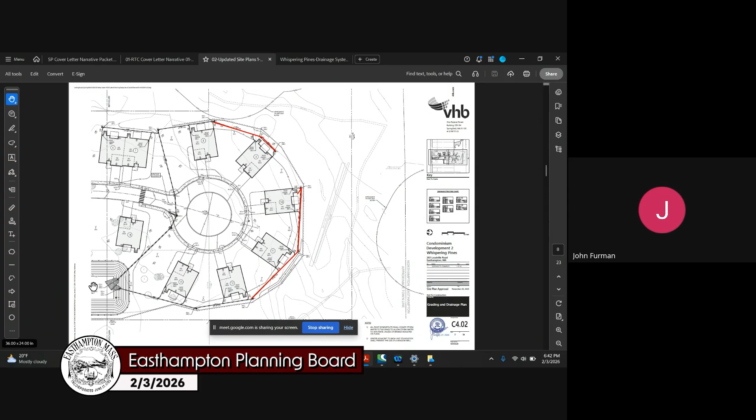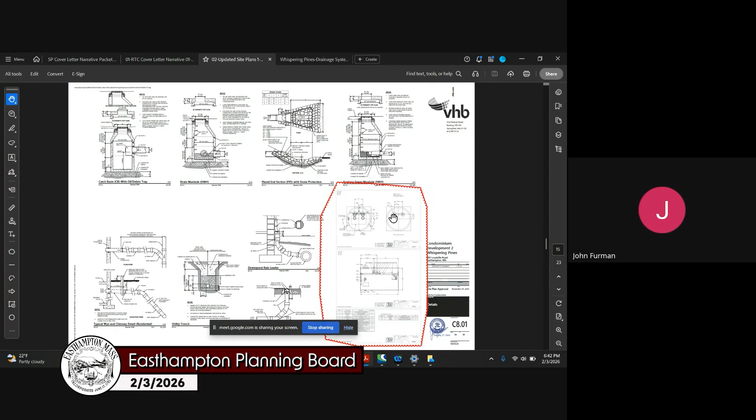The last item is the update of the pump station detail, right here. When we submitted, we had used our VHB standard detail, showing a precast concrete dual pumping system with a precast concrete valve box. What we used at Pineview was a pre-manufactured pumping system—it's round, the pumps are located in the wet well. It comes manufactured and delivered to the site with all the pumps and controls in it. Very easy to install, basically foolproof: you dig a hole, put it in, brace it, connect the inlet and outlet, power it, and you're done.

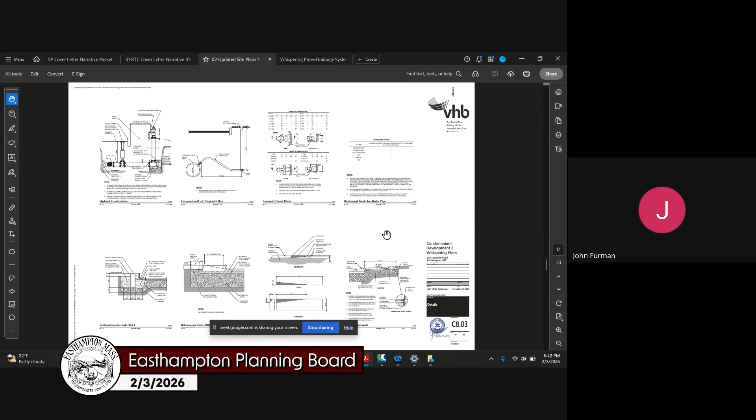So those are the updates to the plans that were prepared. And then lastly, in the letter, we had provided draft copies of the master trust, master deed, and the homeowners association agreement. They're in draft form, but as our comment letter basically said...

When we submitted for Pineview, this board had some comments on the Pineview documents. So when we created these documents, we basically used Pineview, which incorporates all of your comments. The concern of the board was identifying that the homeowners association was 100% responsible for all the road and utilities and the maintenance located there. There was some sort of messaging system to abutters in there as well, although no abutters have stepped up to be the head of a neighborhood group like they did on Pineview.

So in looking at what we submitted, we believe we have addressed the comments that we can. Just before the meeting, Dylan forwarded an email to me that I believe he received from one of the abutters an hour ago, basically complaining about the neighborhood meeting. I just want to reiterate that in that email, she requested 30 days notice for another abutters meeting.

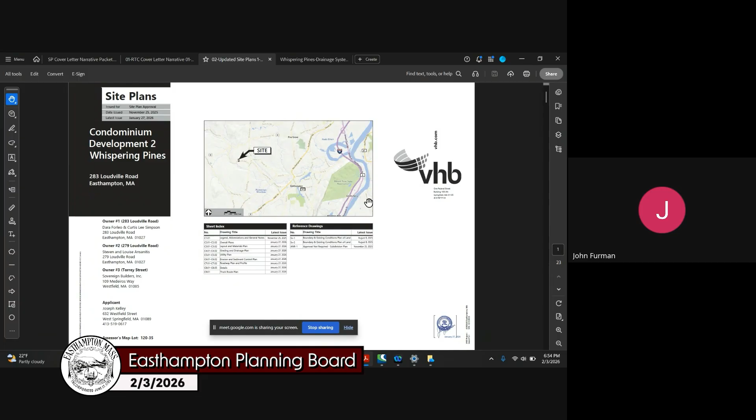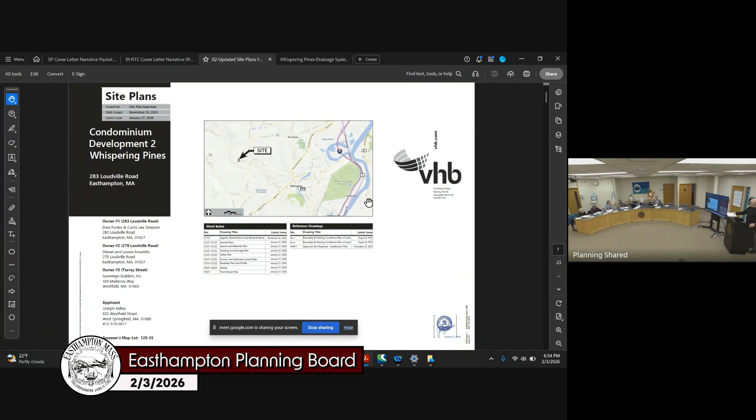Clarifying question: you said north, a big chunk of the property north is open space, but there's a wetland close by blocking it off, right? Is that the side he's talking about, or the side toward the big pit on the other end? If you look, this is north here, so it's toward the pit, this direction. This is the Northampton line, and this line right here is the Northampton-Easthampton line. So we actually can't connect to this property because a different landowner owns the land between us and that property.

So it would have to seek access rights from that individual to make a connection to Northampton. It sounds like a great idea, we just don't have the ability to do it. There is a path on the ground today, so it would just be a question of formalizing it to the property line, and then indeed it's out of our hands.

There is a question - this is a private development, and there is a concern regarding liability. How do you ask a private entity to provide liability to the general public if someone gets hurt on the property? So there is no desire from the developer's point of view to make the property open. That piece of property shaded in gray is absolutely 100% open to anybody who's a resident in Whispering Pines. They can walk back there all they want.

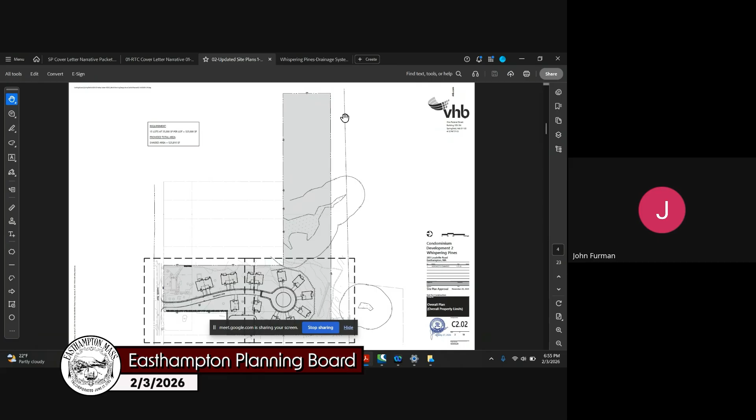Thank you. Any other comments or questions? Anybody online? Anyone online who would like to speak? You can use the raise hand function, and I'll give you the ability to do so.

Seeing none, okay. Any other comments, questions, or thoughts? I think we definitely need to continue this to at least get a draft decision with conditions for us to go through at a future meeting, but I don't know if anybody has anything else they want to raise at this point.

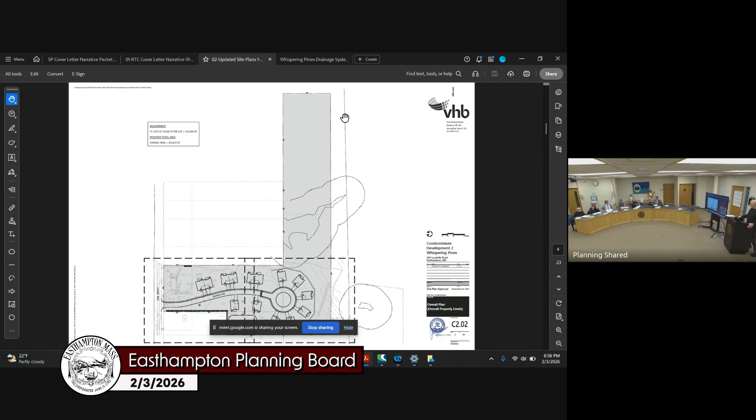I'd like to suggest we stick with the $114,750, given it's approved by the city engineer as a bond requirement in the draft. Yeah, I think we've talked through several conditions that Dylan can get into a draft, and we'll review all that at a future meeting and go from there.

Dylan: So for getting the draft decision together, I'm going to include what we've talked about at these last two meetings, plus decisions and conditions from the previous few developments you folks have approved. I want to send that out to you, and if you have comments, just reply to me directly about that. I can edit them and send them out.

Is that the way you'd like me to approach that, Jesse? Yeah, I think ideally we'll come and talk it through at the next meeting. And if we need to, I think we've done this in the past where we can even make revisions in here if we have to.

I think that's probably cleaner than having everybody's deliberation. Yeah, that makes more sense, and we can also send the draft decision to the applicant, and post it on the website, so people can see that in advance of the next meeting. Wonderful, I'll do that then.

So that leaves you a lot of homework. Yeah, I'm more concerned about your timeline than anything else. I know we have a meeting next week, which is probably too soon for you to get that done. So when would work, if you look at our brand new schedule for the whole year?

So what we have right now, we have somebody on for next week. We've got a special permit and site plan approval application for the American Legion. I'll be sending you folks all the information tomorrow. Then you folks have a joint meeting with the ordinance committee on the 3rd.